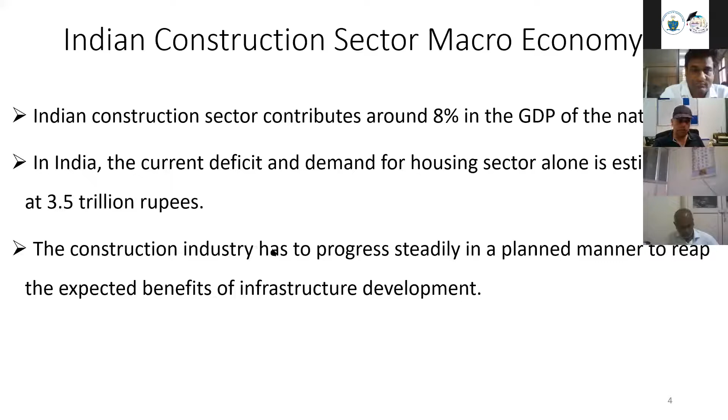Given the current scenario, it becomes more important to go for construction activities which require less time and less human intervention. We have to think out of the box, because traditional construction activities are not going to work now—there's a requirement of more manpower at the site and more human contact. We need construction where human contact is less and speed of construction is fast. This is where precast and prefab construction becomes more relevant.

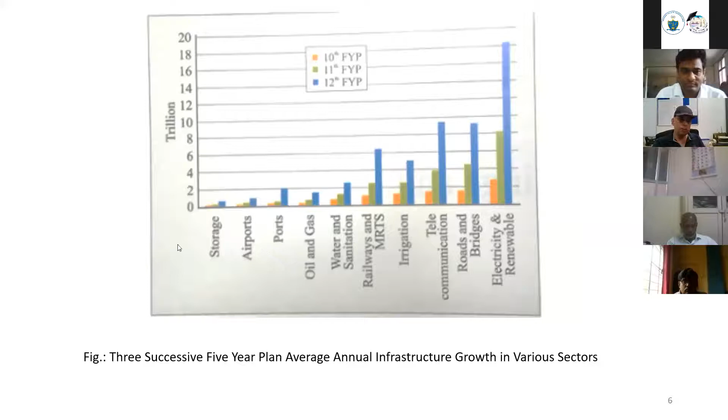In terms of growth, we can see a steady rise, but we are still far behind contemporary countries. Looking at three successive 5-year plan average annual infrastructure spending, we are lying somewhere here—railways need construction, roads and bridges need construction, electricity and renewables need construction. So construction is everywhere in the major sectors where government is spending heavily, and this is the amount being spent through contribution by various agencies.

We are, of course, very near to 2022, so the demand can be about 50 million units. And the construction of new houses is becoming complex due to high prices of land, material, and lack of initiative in new construction methods.

To overcome such challenges, many countries across the world have promoted precast construction to be applied in infrastructure practices. If you recall, when COVID started and the Wuhan episode happened, there was a lot of news about China making hospitals within a few days. That was also a sort of precast or prefab construction. Now governments across the world, including India, are struggling to make rapid constructions for hospitals.

In fact, because of that, they are taking railway wagons for housing patients. If we had rapid infrastructure and construction practices, those railway wagons might not have been required. But maybe down the line we'll also develop such techniques so we can rapidly make buildings, like China made a complete hospital building in 3 to 4 days. It's like governments are going well ahead of us.

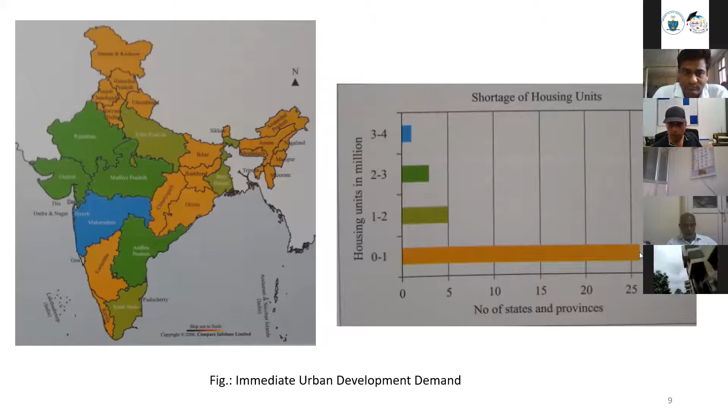Singapore's government issued guidelines for precast construction to be used in housing systems. Precast systems were popular as they were found to be superior with shorter construction time. If you see the urban development demand, the shortage of housing units is immense. This talks about 2012, but if we talk about 2022, it's almost double the demand now.

Coming down to precast and cast-in-situ concrete. How do we define precast concrete? It is a construction product produced by casting concrete in a reusable mold or form, which is then cured in a controlled environment, transported to the construction site, and lifted into place. Whereas cast-in-situ concrete is where we carry out the activities at the building site only.

The simplest example of precast concrete you can understand is paver blocks. That's also a sort of precast concrete because paver blocks are constructed at casting yards and brought from there. We cast concrete in reusable molds or paver block forms, cure them in a controlled environment at those yards, and then transport them to the construction site wherever needed. That's the simplest example, but of course a very small unit.

People nowadays talk about slabs, beams, columns, and so many things - we'll come down one by one to that. The obvious advantage of precast concrete is that we have a controlled environment with good control of mixing, curing, etc. But with cast-in-situ concrete, we might have made a very good mix design and done everything excellent, but if the person casting the concrete is not an expert, we cannot expect the same quality as precast concrete.

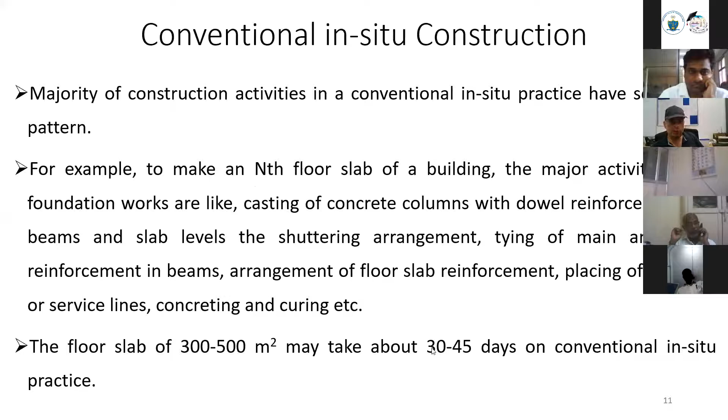Whereas if you go for precast construction, we don't need to wait, because this 30 to 45 days hardly comes down to 3 to 4 days. So if it's a 50-story building, with the conventional method it can take a huge time, maybe 3 or 4 years. And nowadays time is very important, so we cannot do it like that.

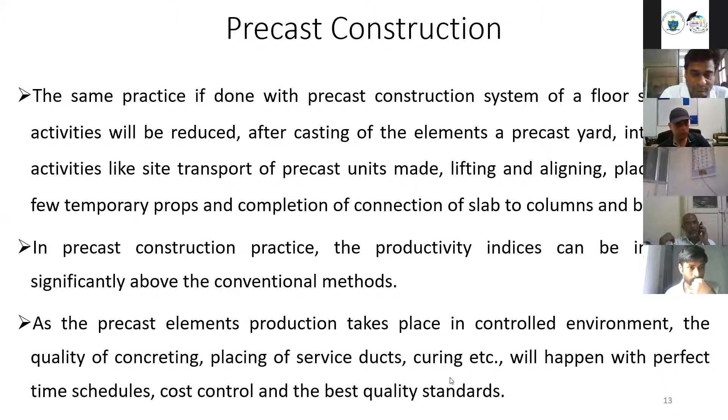And the productivity indices can also be improved significantly above the conventional method. And as the precast element production takes place in controlled environment, the quality of concreting, placing of service ducts, curing, etc. will happen with perfect time schedules, cost control, and best quality standards. So that is the advantage of precast construction.

So if we sum up the merits of precast construction, one is it's highly durable, it's fast deliverable, highly versatile. You can have any shape, any size as per your wish. It is economically affordable and it conserves materials and promotes sustainability. So overall, we can define the merits in 3 categories: quality, time, and cost. Better quality, less time, and less cost.

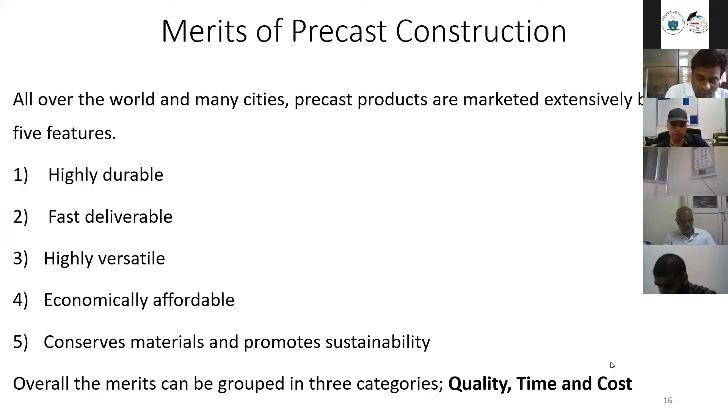Cost, of course, sometimes questions may be raised that it depends on the scale of that activity also. But at large scale activity, cost is always less. If it's a single house and the house types are different, then it might not compete in cost, but quality and time, it always will compete. For large scale construction, the cost will be less, except very small constructions or very typical types of constructions which are different. Here, the cost will be less if there's a large scale construction and the type of construction is same, all the building units are of same type.

So you can see this time, quality, cost, they are the merit factors of precast concrete technology. Quality, as I have already said, in case of ideal factory environment, all seasonal effects and difficulties are eliminated. We know that those who have been working in construction or in concrete technology, even in the lab, if we cast the concrete in summer or in winter or in rainy season, we get different strengths. So if it is difficult to even have quality control on the external environmental factors in our concrete labs, then it's very difficult to have those controls at the sites.

Okay, so that is very important. We need to understand this, that when we cannot control the same thing in our academic labs, how can we control that at the sites? So the controlled conditions of factory or casting yards make use of high strength concrete and lightweight concrete or other special concrete mixes easily advisable, they can use easily. They can have tight scheduling, work organization, and expert handling, which leads to more efficient quality management. There's more accuracy and better craft work for finished product which is easy in factory production.

You can have better type of formwork because it comes to the cost of formwork also, because if you are having a formwork for say 2-time use, or if you are having a formwork for 1,000 times use, then it depends.

The cost comes down, so they can spend on the form works also. Mechanized ways of concrete production enable concrete products like hollow core slab, rib slabs, etc. Use of color concrete, rubber, plastic fiber, and FRP liners and steel molds can bring exquisite surface finishes.

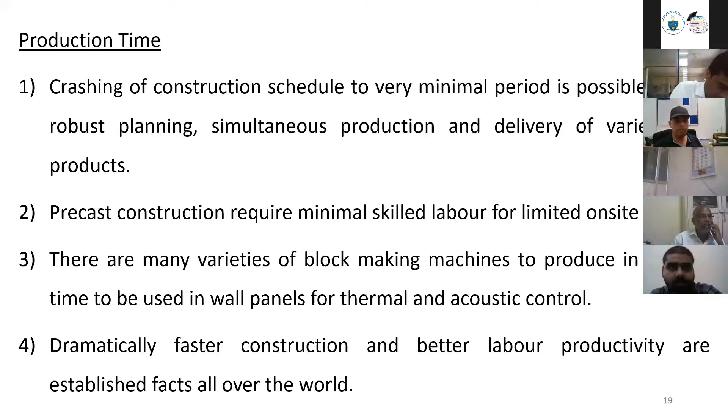If it comes down to production time, it's very obvious that production time will be less. We can crash the construction schedule to a very minimal period due to robust planning, simultaneous production, and delivery of variety of products. It requires minimal skilled labor for limited on-site works, because you need more skilled labor at the casting yard only. At on-site work, there's just jointing or connections of the precast elements. There are many varieties of block making machines to produce in short time. There's dramatically faster construction and better labor productivity, which is an established fact all over the world. That's why all over the world people are moving towards this side.

Cost and material savings can be achieved because we can have optimum use of concrete to steel, and because we'll have technical experts with us and we are using multiple times the things. So material saving will be there. Saving will be on limited use of temporary support scaffolding. Saving of construction material can be up to 30 to 50% by innovative structural forms and design of building components, which in conventional in-situ construction is not possible. The financial loss due to extended project completion can be avoided by precast construction and planning.

Now, along with precast construction, there is another term which is used: prefabrication technology. The use of precast concrete technology highly depends on the innovation of design of structural systems, concrete technology, production of prefabricates, and application of modern lifting equipments. That's very important. We'll come down to that, the lifting of these precast elements, that's very important.

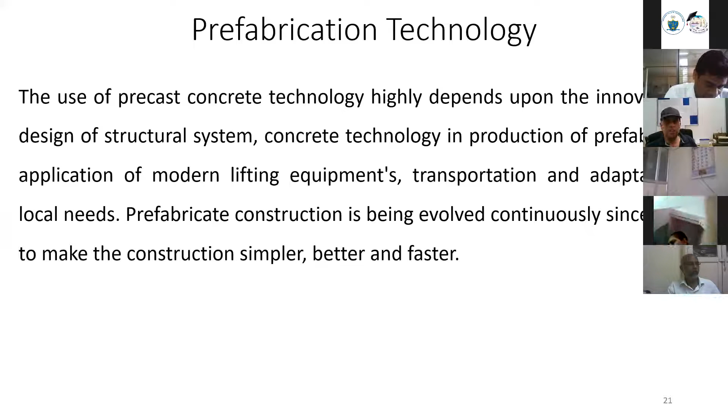You can cast wonderful precast elements, but if you don't lift them properly, the stress distributions will change, and the precast units might not be of any use, or they might even fail even before application of real load.

What we need to do in precast technologies, we need to have meticulous planning to use optimal resources and coordination with all stakeholders from the beginning of the project to completion. We need to focus on design, conceptual, innovative structural systems with more repetitive elements and optimal quantity of materials.

In fabrication, we need to achieve superior quality over conventional construction. This is very important actually, which is not there in case of conventional in-situ construction: the erection part. This is a very important aspect. If we don't handle this erection part properly, then all these three advantages will go down, they will have no use. So this part is very important. And here, of course, conventional in-situ construction has a slight advantage because erection is not needed there. So we have to be very particular.

So we need to see the system of transportation and erection of elements with high safety standards. We also need to see that the type of loads, type of moments, type of forces which are going to arise in the precast elements for which they are designed, the same type of forces should apply on these elements when they are being lifted.

Say if we are designing an element as a simply supported beam, and we are lifting it from one end only, then at that time the load is like a cantilever and there might be a failure. It can be vice versa also. So it's very important to see that the type of load or type of moments which are expected finally, the same type of moment should apply on the elements when they are being lifted. So the placement of the hooks or the type of lifting, that is very important.

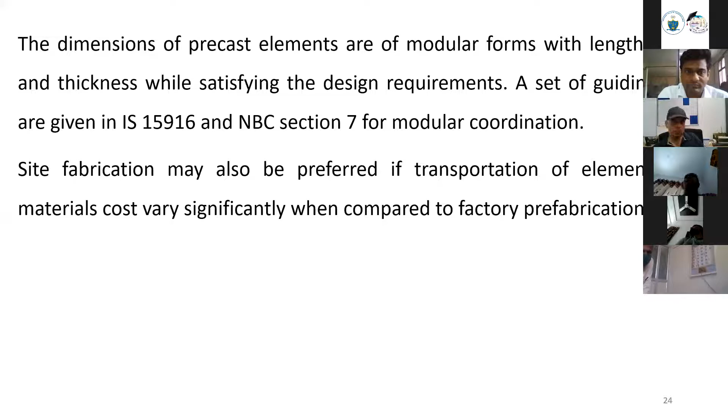Sometimes, like for foundations, we normally don't go for prefabrication or precast elements. So there are certain elements where, even after having very good precast and prefab elements, we still tend to go for cast-in-situ construction. So there is no harm. One should not always try to go for 100% precast-prefab construction or 100% cast-in-situ construction. There is no harm in going for a mix of constructions.

So here you can see precast concrete product manufacturing. Different types of precast concrete products can be manufactured at the sites. You can see slip form construction of a pre-stressed slab at the site. It's manual precast floor slab reinforcement, so the complete slab is this.

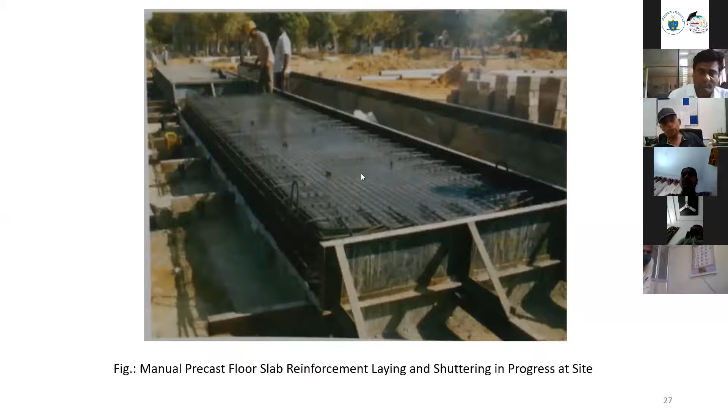Coming down to the important part, fabrication and erection. The issue in fabrication and erection is that fabrication needs to go with modular type of construction, that is important. But for erection, the issue is we need to look into the lifting part. And if we talk about fabrication, one of the important parts is curing, so we can go for steam curing, etc.

Curing can be achieved by 4 methods: conventional water ponding, water sprinklers or mist curing, immersion in tank, steam curing, and chemical spray curing.

It is very important why we are focusing more on curing, because there's a series of activities in the casting yard. If we go for fast curing, then even if instead of curing for 7 days, we go for curing of 4 days and get the same strength, those additional 3 days can be used for casting other material. So it's very important to reduce the curing period as small as possible in precast construction, because that will bring economy of scale. That's why curing is given a lot of importance in casting of precast elements.

Similarly, demolding is also related to curing. The earlier the curing is achieved, the earlier demolding can be done. So demolding is also a very skillful process. A 1-day or alternate-day cycle is to be chosen to improve production of precast elements. In flat elements and long-span beam elements, side shutters can be removed after 1 day, and bottom shutters after 3 to 5 days. So casting, demolding, and curing are all very important.

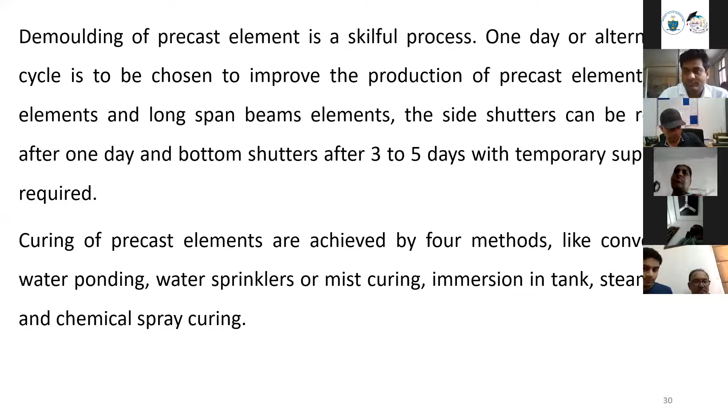We need to reduce the time as much as possible, because here it's not like in-situ construction. There's another lot which is ready to be made as precast elements. So even if we reduce the cycle by 1 or 2 hours, it leads to a large change in the economy of the casting yard or the factory.

We just go for plywood or timber mold because we don't need to use that for a large number of times. But here, because every day there's a casting, every day the mold is being used, it's very important how many useful repetitions we can have. For plywood and timber, it's minimum 25, maximum 60. Concrete mold is 70 to 100, steel 500 to 2000. So depending on the scale of the industry, the work order, and the number of elements being made, one can decide whether to go for plywood and timber mold, concrete mold, or steel mold. For bigger industries, one will always go for steel mold.

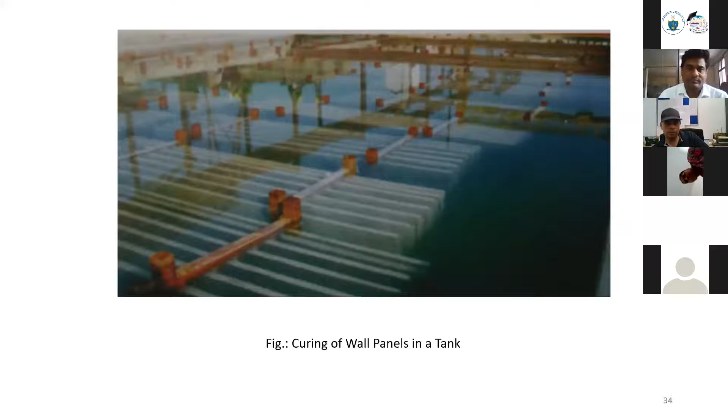This is the curing of wall panels in a tank. Here also you are seeing an innovative way - they have put them in a vertical manner so that a large number of wall panels are cured equally. Such technologies or small interventions we always need to do.

Stacking, lifting, transportation, and erection are all more or less related, and they should not cause quality issues in a prefabricated manner. Stacking should be done with adequate support so the element is stable under its self-weight. It cannot happen that we cast a simply supported beam, meant to replace a simply supported beam, and during stacking we put supports at L by 3 from each end, or sometimes towards the inner side. If supports are placed towards the inner side during stacking, due to the load of other beams above, the beam will start behaving as a continuous beam, but it was actually designed and cast as simply supported. So there might be a failure. Stacking is very important - we need to see at which place to provide support.

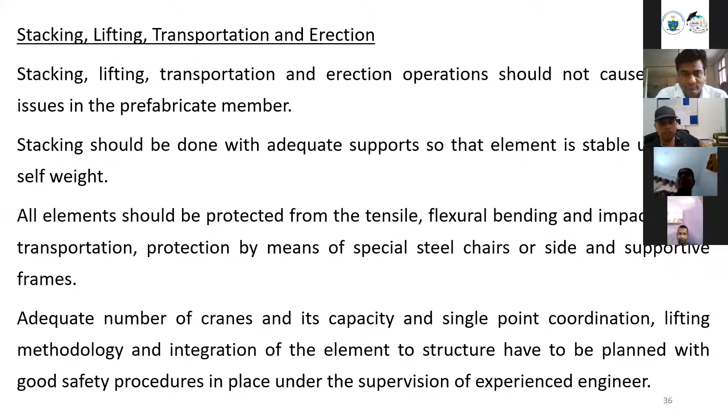When we are placing the precast element, at the time of placement it has no other support, so it is very fragile. If anything happens, the precast element will fall down. This is one of the reasons, I'm reiterating, many elements have failed when they tried to place the precast elements there. So it is very important.

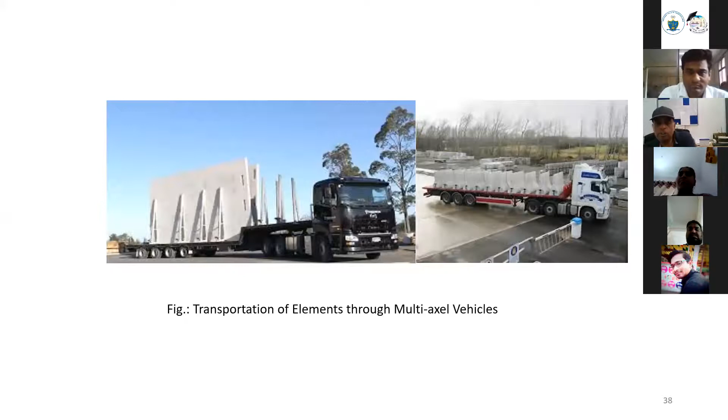Again, erection is very important. During erection, if you change the support conditions, failures may happen. So this erection part is also very important. You have to put it in a particular sequence. If it's a wall panel that is vertical, then when it is being erected, its elevation or orientation is not being changed. So that is very, very important, the erection part.

If we come down to the economics of precast construction, what is more important is the location of prefabricated construction and state taxation laws. Still, if you talk to persons dealing in prefabricated construction, many factories where bigger prefabricated elements are cast are mostly located in places like Himachal or Uttarakhand, where the tax laws are very good and appeal to them. So even if in Rajasthan or MP you are making a prefabricated building and you order prefabricated elements, mostly they are coming from as far away as Uttarakhand or Himachal.

But even then, if the scale of construction is large, it's still economical. But consider a case if the same factory is located very near to you, then it will be much, much more economical. So economy in production depends on the modes also.

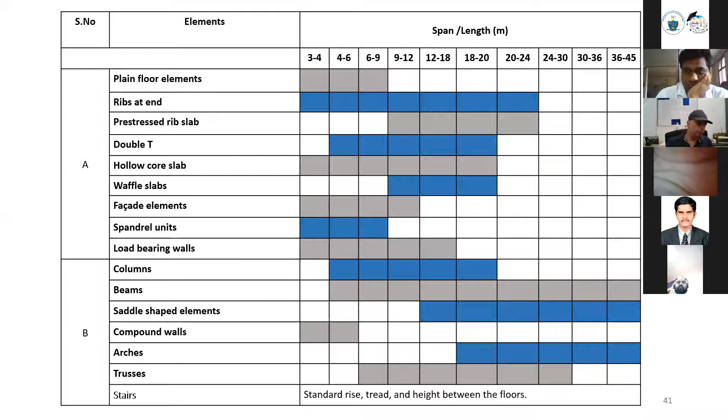Similarly, we know that arches are useful for large spans, so this precast or prefab arch construction is useful only for larger spans. So for every element you need to see this tentative guideline, whether my precast construction will be economical or not. If I am going for a pre-stressed rib slab, and it's a small rib slab, this might not be economical precast construction. But from 9 to 24 meters, the precast construction might be economical.

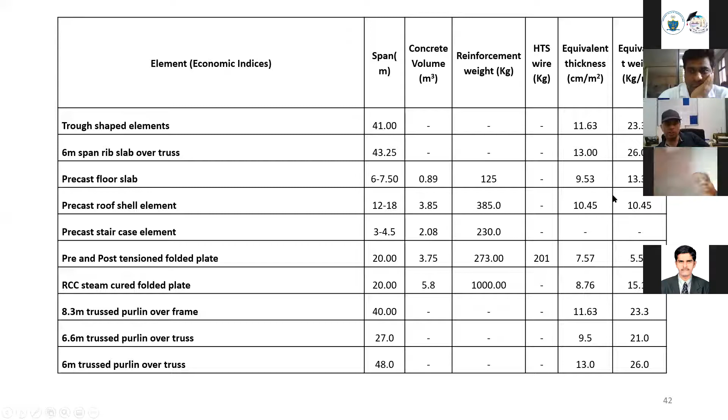This is a rough guideline to decide whether you should go for precast construction or prefabrication of elements. Some economic indices are given here, like a 6 meter span rib slab over truss, with span of 43.25 meter, equivalent thickness, and equivalent weight given in the literature. From there you can pick the cost which will come in precast and prefab construction.

Different types of prefabricated elements include columns, beams, slabs, and even staircases are available nowadays - prefabricated staircases, lift walls, lofts. So all types of elements are available.

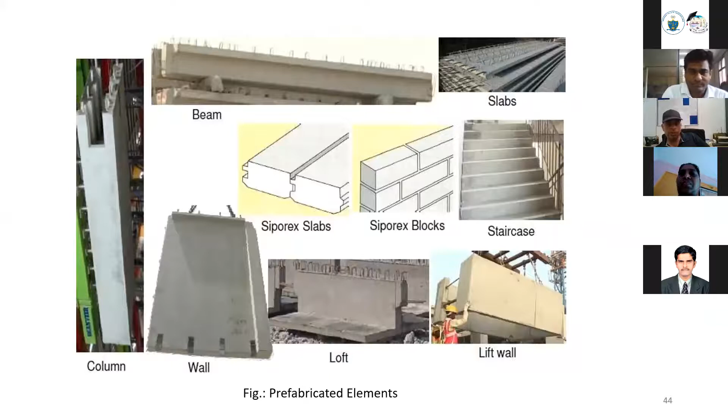Now coming down to building systems, having discussed the types of precast elements, we can define precast building systems in 3 categories: overall structural system, system for lateral load resistance, and floor and roof system.

The structural system can be a skeletal frame system, large panel system, cell system, or hollow block system. In skeletal frame system, we can have low-rise portal frames, multi-storied frames, and slab column systems with shear walls. Those we see in conventional day-to-day life are more or less skeletal frame systems, suitable for schools, industrial buildings, commercial buildings, parking structures, airport terminals, and storage facilities.

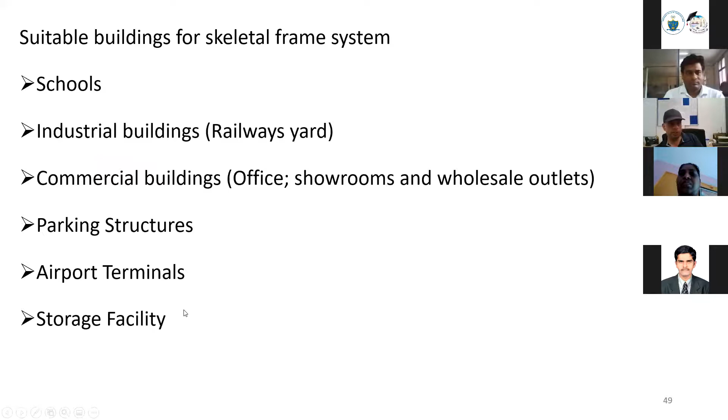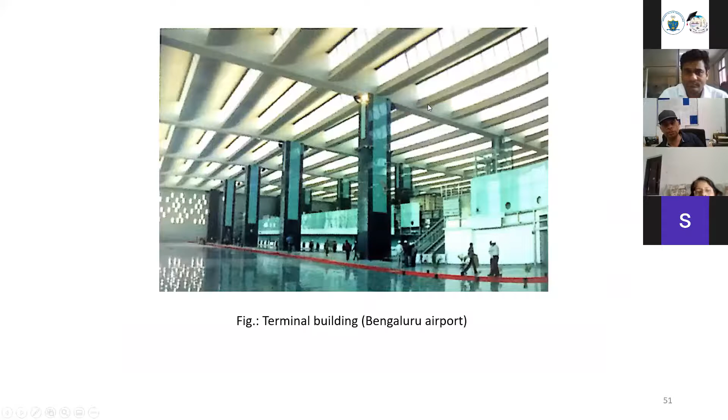This is the terminal building of Bengaluru Airport, again a precast construction. You can see the shape and size which is difficult to achieve with conventional in-situ construction. Other examples include the material storage shed in Patna and Nehru Stadium in Chennai.

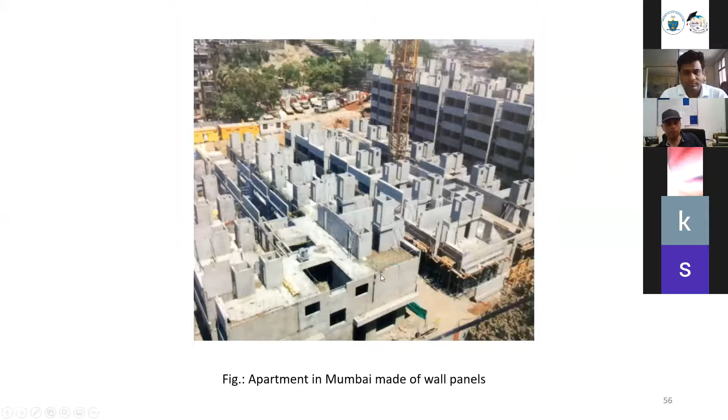Large panel systems have load bearing panels, with advantages like close partitioning or space achieved, smooth surface finish, insulated panels, and proper joints. Suitable buildings are residential buildings and miscellaneous dwellings. These apartments in Mumbai are made of wall panels - more or less a wall panel type of construction.

You can also have cell systems, where orthogonal slab and wall are cast together as an integral unit to create a box type structure. They are suitable for enclosed spaces and can be used as a subsystem within another system - suitable for dormitories, hotels, studio apartments, barracks, lift shafts, kitchens, bathrooms, and closets.

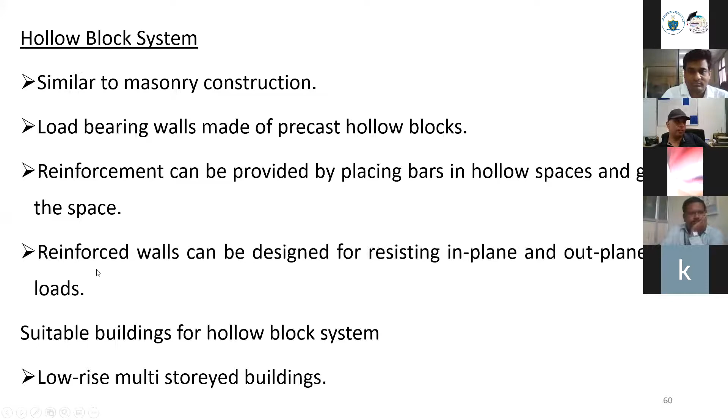Hollow block systems are also possible, though quite old. People used to have them, then shifted away, but nowadays with improved construction quality, people are again talking about hollow block systems. Two decades back there was a lot of talk about hollow block construction, but the construction cost and quality were not good, and the thickness of elements was very small, leading to a lot of failures. Now sophisticated machines are available, so people are moving to the hollow block system.

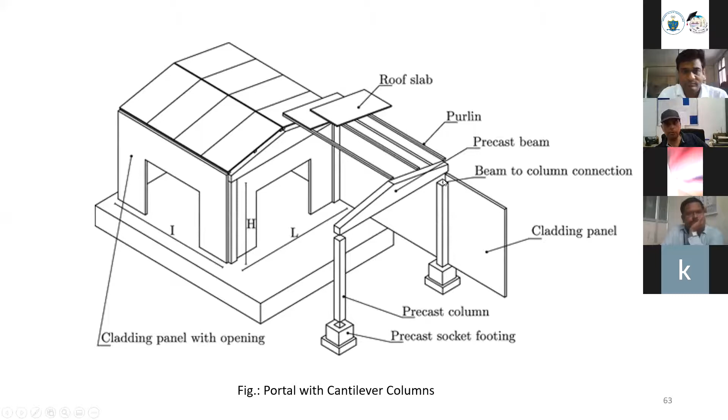You can make systems for lateral load resistance like shear walls. For low-rise portals and frames, like cantilevers fixed to foundation, you can have a cladding panel with opening, precast socket footing, a precast column, cladding panel, and beam to column connection. Different types of activities are possible.

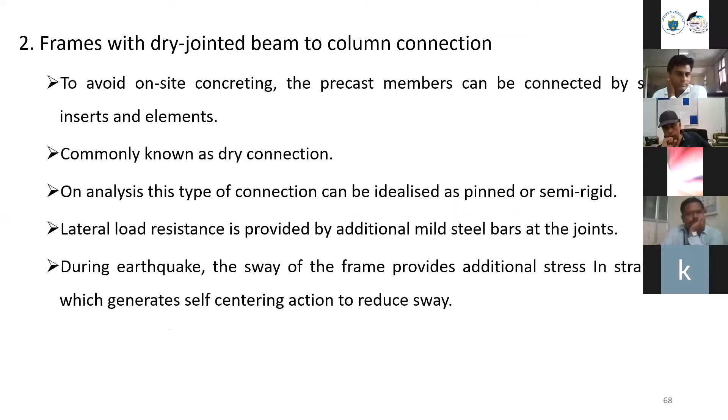You can have frames with dry jointed beam to column connection. As the name says, dry connection means you need not do any in situ construction there. You don't need to cast something there. So for that, you need to have corbels etc. So you can make your elements like this.

Similarly, you can have wall systems also. Different wall systems you can make using composite construction, this precast construction. Floor systems also, you can have different types of floor systems. You can have multiple one-way precast units.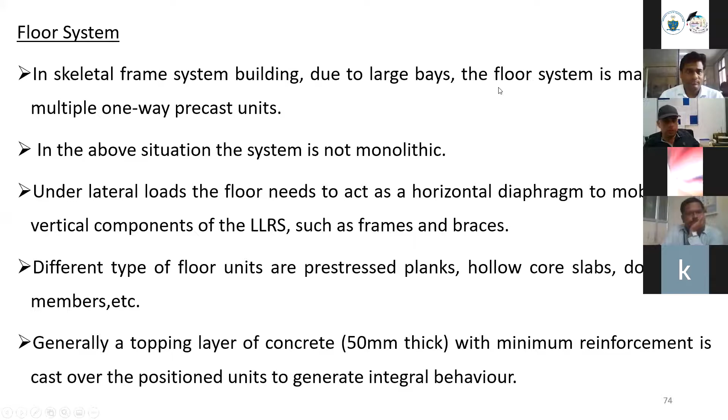What is important is when we talk about floor systems, we always know that in structural engineering, whatever we analyze, we have one very strong assumption: that the diaphragms are rigid, that is, there is no in-plane deformation in the slabs. So in the floor system, it is very important that your floor slab satisfies that requirement that the diaphragm is rigid. So one needs to understand that, and different types of interventions you can do to keep the diaphragm rigid.

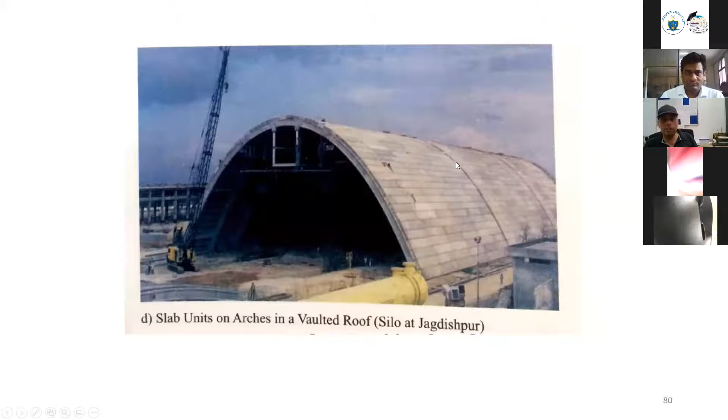Then roof systems, also different types of roof systems can be used. Here you are seeing slab units on trusses, slab units on truss purlins, slab units on trusses again. Here you can see slab units on arches in a vaulted roof, this silo. These are different types of slab units, placed on sort of arches in a vaulted roof. So you can have multiple types of construction.

Now what is important for columns is because the beams will be placed on the columns, it is very important that the beams can be placed properly on the columns with a proper connection. I think there are certain queries, and I will come to those one by one, just once this is finished. So the columns - what is most important is how we are going to place the beams on the columns.

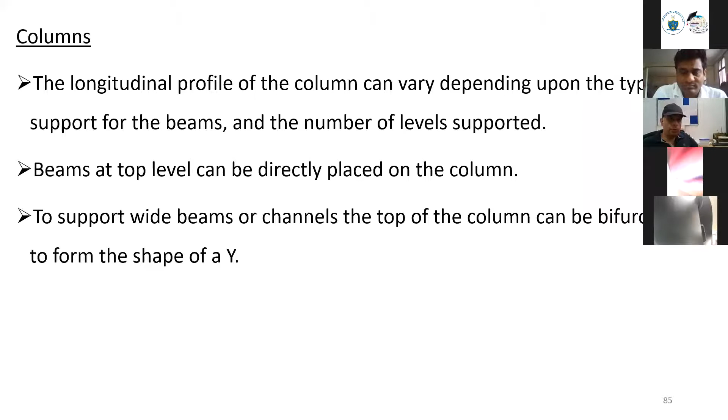The idea is you have to place the beam safely, and the way in which you are placing the beam, the analysis should reflect that. If I'm placing the beam here like this, then it's going to be like a simply supported beam, or the joints are pin joints. But if somehow I pass the beam through the column and then do some wet casting here, then I have to design it as a rigid jointed member. So that is what we need to do.

So you can see here the girders with gutters, and trough girder also you can see the Y-shaped column, this Y-shaped column.

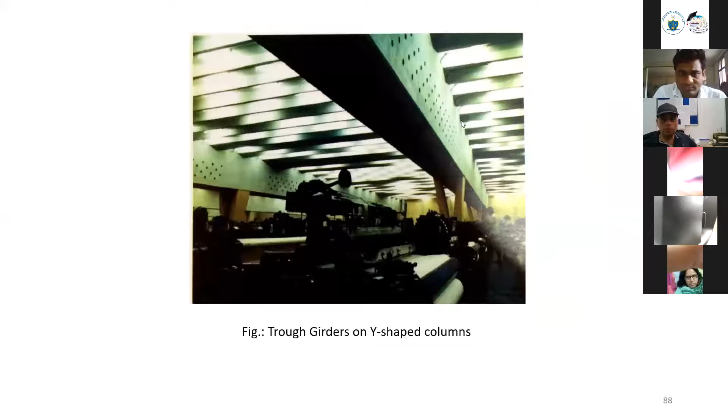So through this Y-shaped column there is a trough girder which is going on. So they have their own floor units. They can be a plank, hollow core unit, ribbed slab unit, single T and double T units, waffle slab unit, or composite slab units.

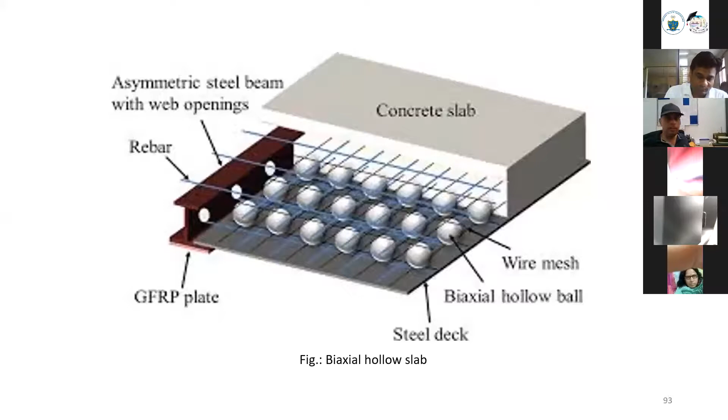So like these are hollow core slab units, and these are double T units. You can see double T action here. You can also have biaxial hollow slab - you can see there's a hollow slab with biaxial hollow balls put in to reduce the weight and to have more rigidity.

In case of roof units, similar to floor units, roof units are defined for use. You can have purlins, roof girders, trusses, arches. Even these precast concrete trusses are available in the market - you can go for arch type truss or triangular type of truss. You can get them readily from the market, from the casting yards.

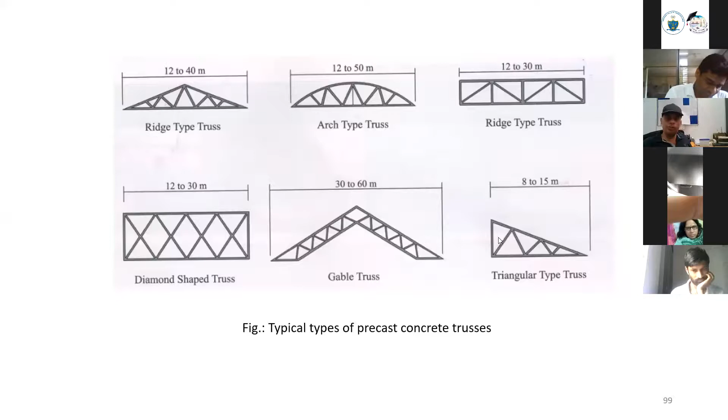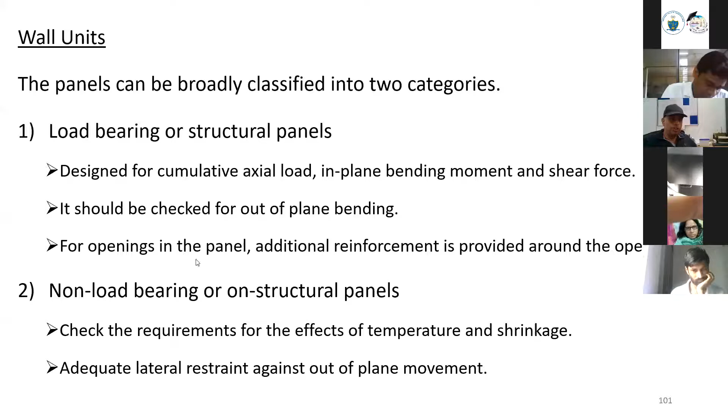Wall units can be of two types: one is load bearing or structural panel, the other is non-load bearing or non-structural panel. So these are load bearing panels which will take the loads, or we can have facade panels. In foundation units, what we need is for it to take the load of the column etc, so we can have socket units or pad and pedestal units. This is how we can have the foundation units.

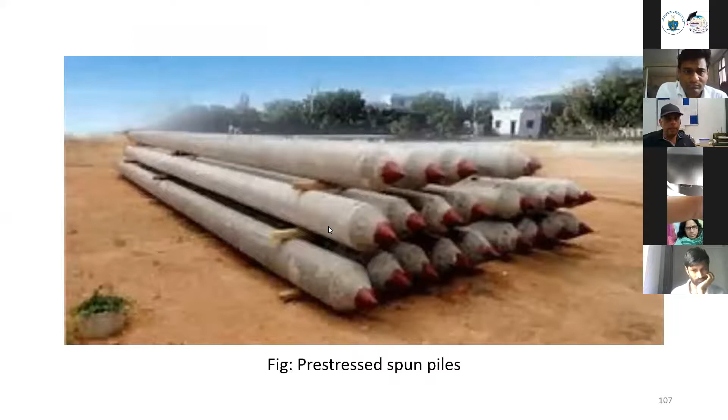We can even have pre-stressed spun piles and miscellaneous application units like stair units, balcony units, lift shaft units. This is formwork for precast staircase - you can see precast staircase here, and you can also see erection of precast staircase.

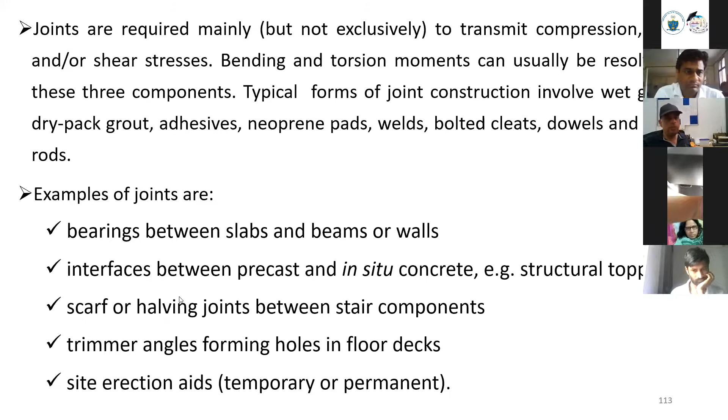What is more important in case of precast units is connection, because if you are not able to have proper connection, then your entire design can be a failure. There can be different types of connections: column or wall to foundation, column to column, beam to column, beam to beam, slab to slab, and structural steel work. We need to work on those joints.

From a resistance point of view, the building should act as one. So it's very important to have a proper connection so that the entire building becomes a single unit. It should not behave in isolation.

Thus it is clear that all aspects of component design and structural stability should be dealt with simultaneously in the designer's mind. Structural stability is the most crucial issue because it involves design of both the precast concrete component and the connection between them. So we need to work on stability and robustness. Stability means adequate resistance against side sway, while integrity and robustness mean correct joint design, attention to detail, and prevention.

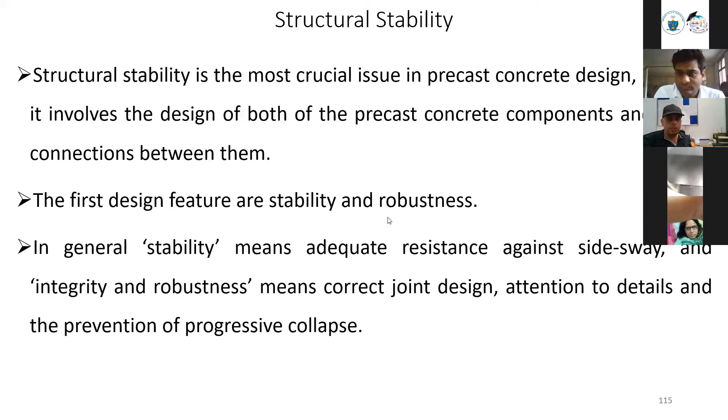So these are the keywords: stability and robustness, if you are working on precast construction. They are scrutinized by checking authorities more for structural stability, integrity, and resistance against abnormal loads than for design of individual precast components, which usually have adequate factor of safety.

It's very important to understand that just because we have precast components doesn't mean our building becomes safe. The precast components are made in the factory where there's a lot of quality control. But in the end, if they are not seen in totality within the entire building - how they're acting and the total behavior of the building - if you're not able to see that, then there might be a problem. So it's very important to see the structural stability, integrity, etc.

The problem is to ensure adequate ultimate strength and stiffness, but more importantly to ensure that the failure mode is ductile. We know that from an earthquake resistance point of view, the failure always has to be ductile. So we need to design the joints such that the failure is ductile, and a large factor of safety is less relevant to overall performance criteria.

You can have wonderful precast elements with a factor of safety of 5 or 10, but in the end, when they are put in the building and not put in properly, that factor of safety doesn't carry any meaning. Finally, it is the factor of safety of the entire building that matters. So it's very important how you place them and how you connect them together.

What are the challenges in precast construction? The execution of a prefabricated building is a complex task with a specific time schedule and competent technical skill. Production technology and erection of components are inseparable activities, so you have to work in harmony and synchronization at the site as well as off site. There's a combined and simultaneous involvement of architects, designers, mold specialists, foremen, contractors, and planning personnel, so a lot of involvement of many experts, which requires proper coordination.

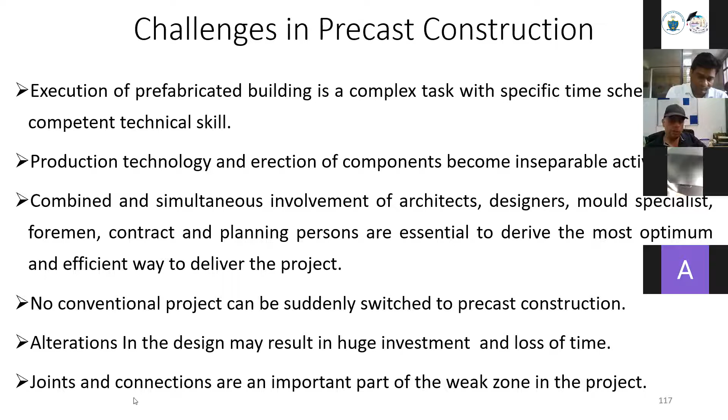So it is very important. If you miss out on one joint, then your entire project may fail. Your individual elements might be extremely good with a very good factor of safety, but in the end, the joints and connections should be done in such a manner that you get a good building. And these structures are more sensitive to dynamic loads, hence the safety of the building needs to be checked adequately.

Why dynamic load? Because in dynamic load there's movement of the building and there's stress or failure. The zones of failure are the joints, and joints are the weakest part in precast construction. That's why they are sensitive to dynamic load. Then there is a high initial cost of factories, transportation, logistics, and lack of skilled labor, which are other causes of a slower growth rate in India. Also, no robust analytical tools are available for precast and prefabricated buildings as of now.

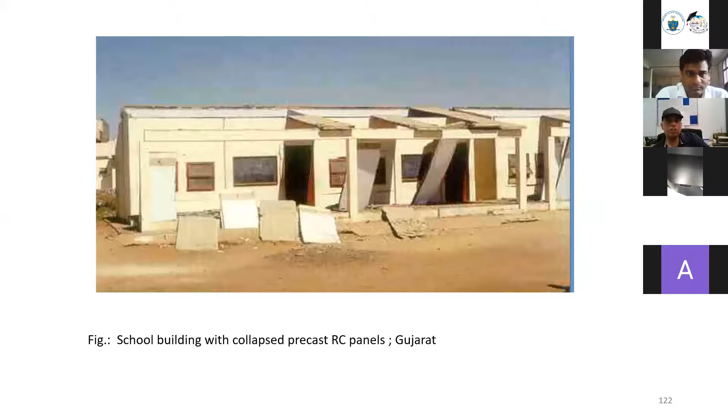A few cases you can see: precast housing in Jamshedpur, hybrid construction, tunnel form on 3 sides, this is a view of the fascia wall. You can see here a precast building with precast footing, columns, wall panels, roof, and step units. And here, because the joints were not proper, this school building shows collapsed precast RC panels. You can see there is no crack, no failure in the panels even after falling down. That means individual panels or elements are very good, but in totality they could not deliver the results expected.

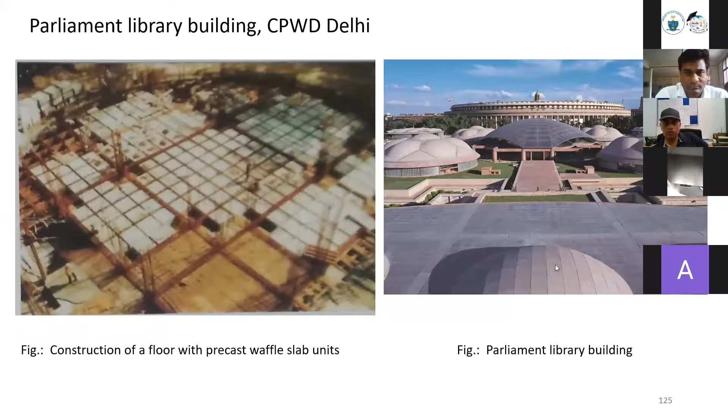Then this Ocean Engineering Center, IIT Madras, here you can see a precast roofing system with V-shaped folded plates. And here is the Q complex at Tirumala, again a precast construction. The Parliament Library building also is a precast construction, you can see these elements are precast elements which have been placed later on. This is the L&T building, again a lot of use of precast elements, a 4-story plus stilt plus ground structure supported on columns. And this is Cyber Towers, Hyderabad, where 40 mm thick precast waffle slabs have been used.

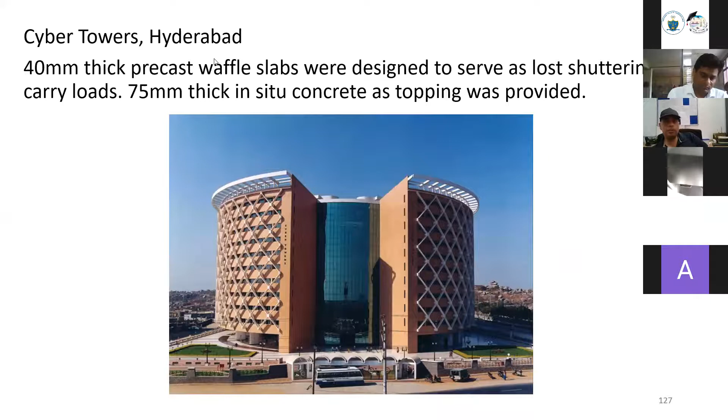And the Passenger Terminal building, Bangalore, again here we are seeing precast construction by L&T. So different types of buildings are there in India where people have successfully used this.

Okay, so now I'll deal with a specific type of construction: steel concrete composite construction, a specific type of precast, or you can say prefab construction. Here, mostly we have the girders of steel and other beams or slabs of concrete. It can be vice versa also, but most common is steel girders and concrete slab.

The advantage is speed of construction, because the steel girders don't require any casting or operations at the site. There's flexibility and adaptability with the steel sections. We can go for larger spans. There's service integration. Quality is better because steel always has better quality control. Safer construction - we don't need to do many things at the site. There are environmental benefits - we need not fine aggregate and coarse aggregate, need not excavate them. There's a higher degree of prefabrication because most of the parts or elements are taken away from the factories.

Public damage due to loss in time, route diversions etc. is minimized. You might have seen many times nowadays when bridges cross running roads, they hardly stop the traffic for only 1 or 2 days because they're putting these steel girders as bridge girders instead of conventional in-situ construction. So even in small towns, you will see they don't disturb the traffic on running roads while doing the construction, because of use of this type of construction.

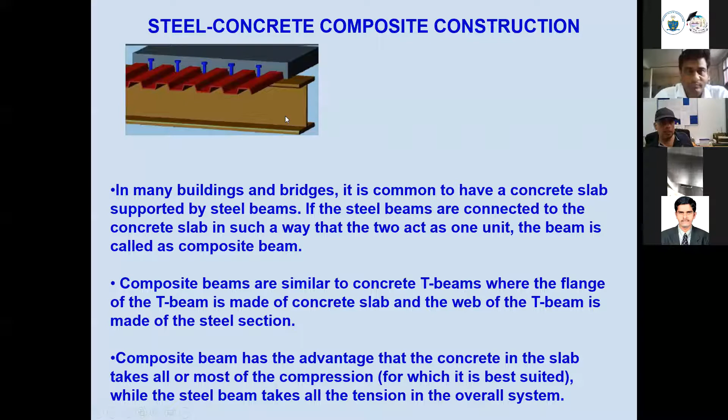This is a conventional steel concrete composite construction where you have a steel girder, profiled slab, and steel shear studs. These shear studs connect the steel girders to concrete slabs. So you can see here steel girders, shear connectors, welded wire fabric, and a bit of concrete cast here. Of course, nowadays people have precast concrete slab also, so there's a complete prefabricated construction also. We'll come down to that.

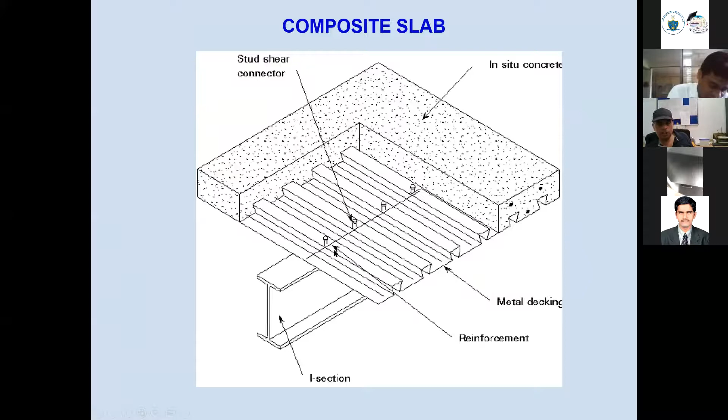So advantages we have already discussed, and now disadvantages. One of the disadvantages is shear connection installation, because you need dedicated and skilled manpower to install these shear studs, as they are the source of stress concentration. There is a lot of stress here, so you cannot go with conventional steel connection material. They are high strength steel connectors and they need a separate, dedicated type of welding - conventional welding does not work on these studs.

So this is how a composite metal decking looks like. You will see here there are deformed ribs, and the deformations on the ribs allow for a stronger bond between the concrete and the decking. So there might be deformations and there might not be deformations - it doesn't matter, but yes, of course, if the deformations are there, the bond is going to be better.

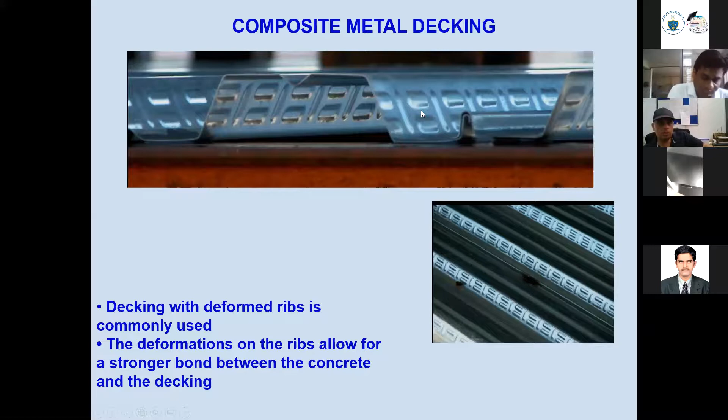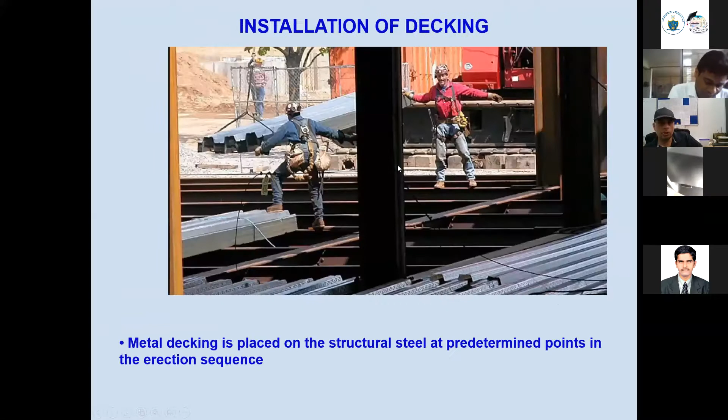Without the deck, it looks like this. You can see very closely spaced shear studs. Here there's a lot of load expected, so that's why. Otherwise, normally shear studs are placed at a certain distance apart.

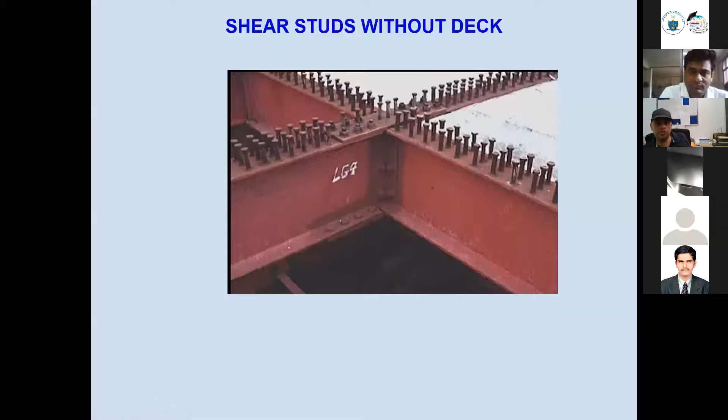Placement of concrete: there's an art to the placement of concrete. Because if you put the concrete initially on one side only, there will be deflection on that part, and that may change the behavior of the system. So you have to be very cautious, and accordingly place the concrete so that there's no permanent deformation in the sheet.

Once the concrete is cast and hardens, the strength will be more because it becomes a composite section. But before that, it's not a composite section — the total load is being taken by the steel girder and profiled sheet only. So you have to design for that case, when there's only the steel girder and profiled sheet carrying the load, and also design for the case when the steel girder, profiled sheet and concrete slab all work together as a composite construction.

That composite case will of course have less deflection, but sometimes more deflection can occur even before that, when the element is not yet composite — there's only the steel girder and profiled sheet without the help of the concrete slab, but already carrying the load of the concrete slab — and permanent deformations might occur. Those permanent deformations we have to handle and avoid.

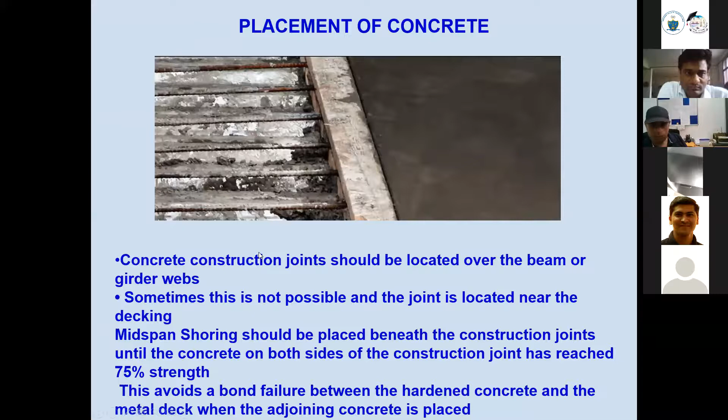The concrete construction joint should be located over the beams or girder webs, and this is how we need to check. For quality control, we can weld two sample studs sometimes and perform bending tests, etc. There are different series of tests given in Indian standard codes also, like push-out tests, etc. So before going for these shear connectors, we need to do a lot of testing.

Once we are sure about their quality, only then should we move forward. Otherwise, if the connection is not proper, it will not be a composite construction — it will just be like a concrete slab placed over a steel beam without any composite action. So it's very important: the better and well-placed the shear connectors are, the more composite action there will be.

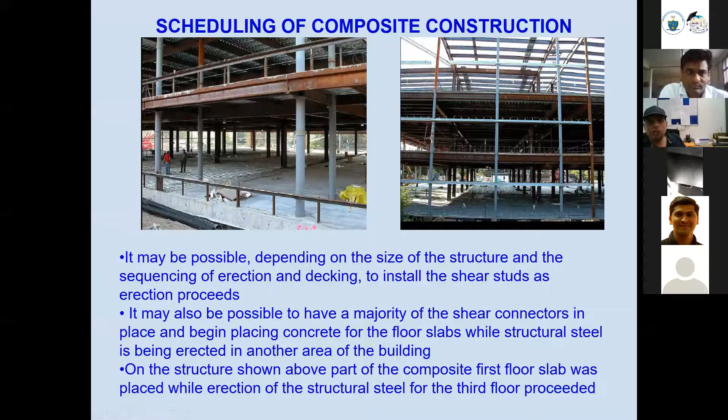Scheduling of composite construction is also very important. The advantage of composite construction is that, as you can see here, work can go on simultaneously at 3 to 4 floors, which is not possible in conventional in-situ construction. So this scheduling can always be done for faster construction.

Cambering can be done in steel girders, but it has to be very cautious and judiciously used, because like in pre-stressing, it's very important to handle it properly since it can go the other way around. If the proper load doesn't come, there will be no advantage. So what is the final load and final deflection we expect? Everything needs to be calibrated and handled very properly.

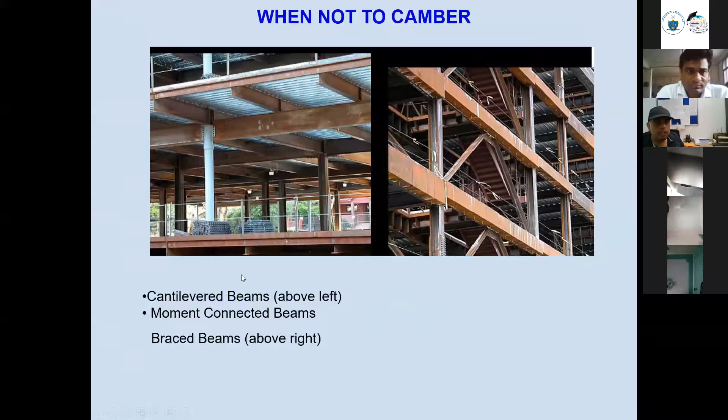This is how cambering is done, and it's also done by heating. There are certain disadvantages like complexity in detailing and fabrication. There are cases when we should not camber, such as cantilevered beams, moment connected beams, and braced beams.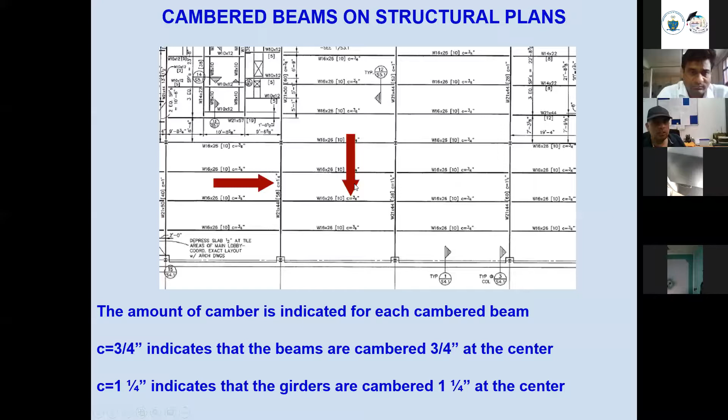For quality control in cambering, there's an American Institute of Steel Construction code that we have to follow. We also have to check the cost of cambering. The final advantage is similar to pre-stressing - we cannot pre-stress every concrete beam of 3 meters or 5 meters, so there's a cutoff point for costing. Similarly here, there's a cutoff point for the costing.

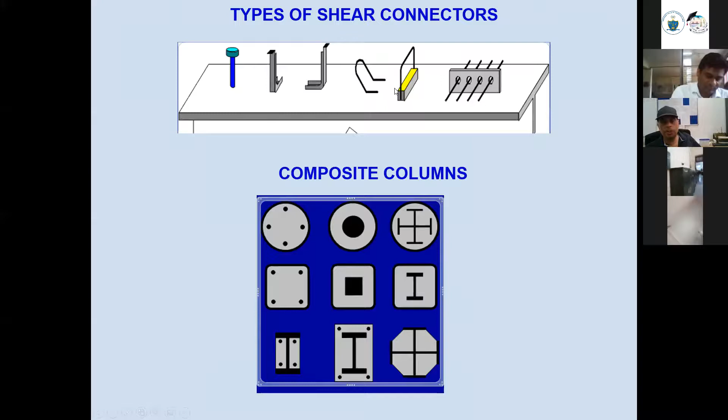The other type of construction, which is more towards prefabricated construction, involves the steel girder along with a precast slab, so now it's much better since there's no in-situ construction. Nowadays people are going with composite beams with prefabricated concrete slabs, hollow core slabs, and different types of shear connectors, like shear studs. The idea is just to have a connection between steel and concrete, so you can have different types of shear connectors and different types of composite columns.

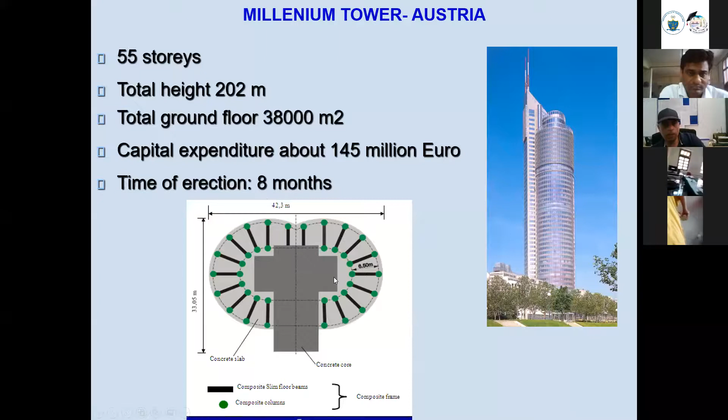An example of composite construction is the Millennium Tower in Austria, a 55-story building with total height of 202 meters. This huge building was constructed in only 8 months, which otherwise is not possible with conventional construction. This was because of the composite construction. These are composite slim floor beams, composite columns, forming a composite frame - here's its plan. Total erection time was 8 months with maximum speed of 2 to 2.5 stories per week, which is not possible with conventional construction.

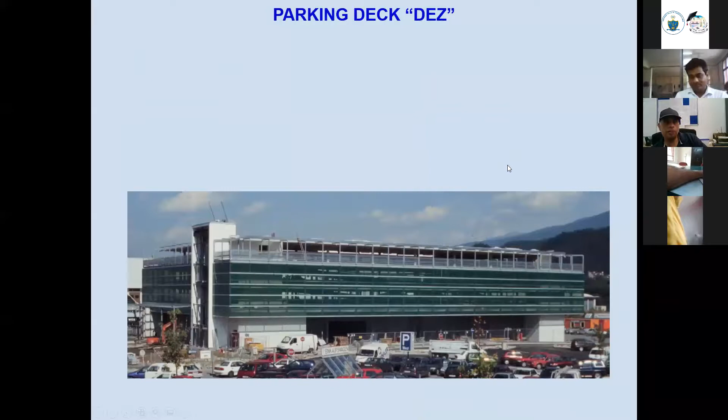Similarly, Citibank in Duisburg was a 15-story building with total height of 72 meters, also more or less composite construction, with a parking deck of 4 stories. This was complete composite construction - they erected composite columns over even 2 stories. In conventional in-situ construction, we know even 4 to 5 feet maximum can be cast for a concrete column in a day, but here a 2-story column was put straight away, not just single story. You can see multiple work happening simultaneously at different floor levels. This is what you can achieve with composite construction.

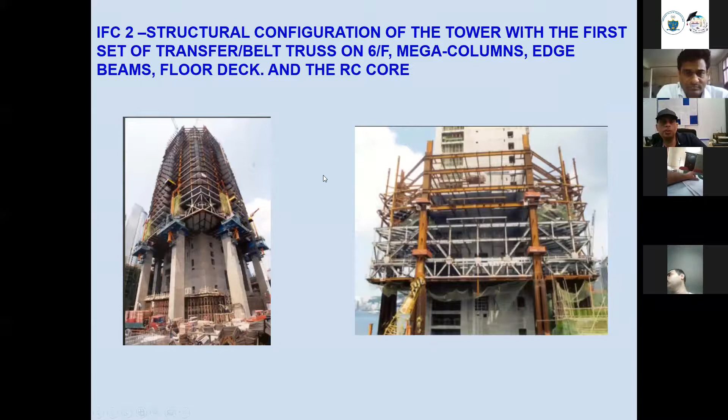These types of buildings are not possible with conventional construction. You can see this is the RC core, and this is the connection from the RC core. There are steel girders going out, and these steel girders are connected to the outer part. So this is how you connect.

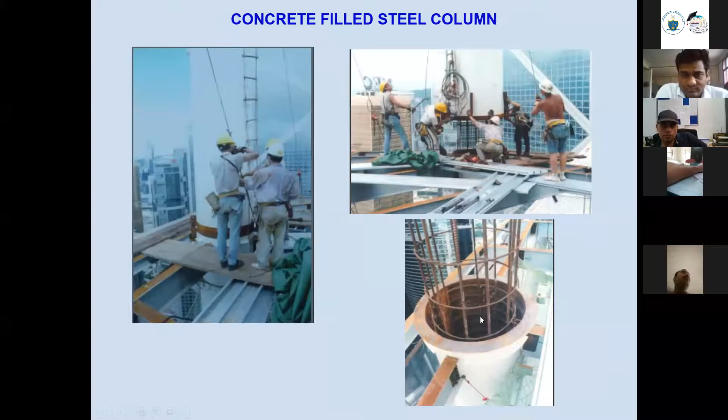You can also have a concrete filled steel column, another type of composite construction. This is a steel column which is being filled with concrete. You can have a square sectioned column also, where we infill the concrete through this. So it can work both ways around - various forms of composite columns.

Here you can see a lot of these extensions - these are actually the shear studs. So you can have different types of composite columns. Steel girders are there inside, then reinforcement is placed here, formwork is placed here, and these steel columns will be enclosed in concrete, whereas here concrete is inside the steel girder. So it works both ways around.

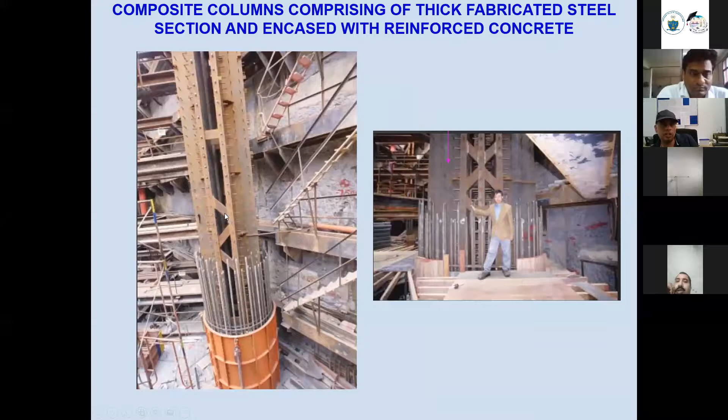So you can see here the composite columns with the studs, comprising a thick fabricated steel section encased with reinforced concrete. So it's both ways - we have seen both figures.

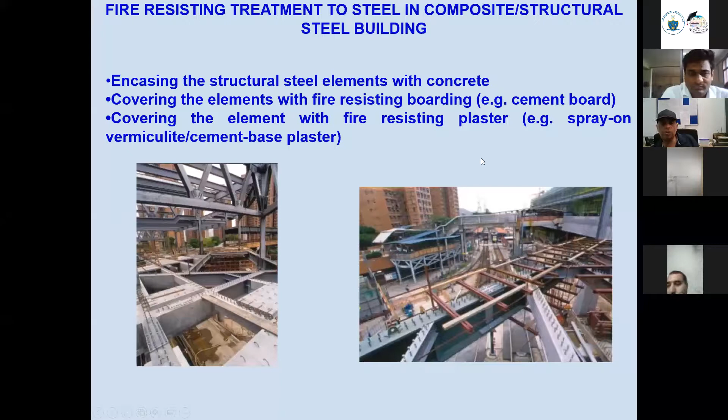One of the disadvantages why people don't go for steel construction is normally the fire resistance, because the fire resistance of steel construction is very small. So nowadays what people do is encase the structural steel element with concrete. You can cover the elements with fire resistant boarding, or cover them with fire resistant plaster. So that disadvantage also nowadays, more or less, people have come up with a solution for.

So you can see different types of these composite columns here. Typically if you see it from a structural point of view as an engineer, this is how it looks like: steel beam, struts, etc.

Sometimes damage occurs in the existing concrete slab of a composite beam, due to higher tensile stresses caused by aggressive environment or excessive loading. So what you can do is strengthen the slabs also. You simply replace the old slab with a new precast slab, and you can use stud connectors or adhesive also. These will give you continuous connection, less stress concentration, no corrosion of connectors. You can control the time dependent effects, and less time will be required.

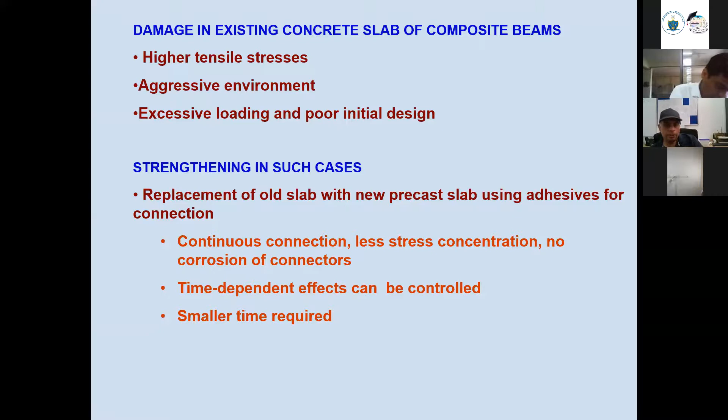So this is how it looks: normally the pockets are filled with connectors, we put the precast slab like this, then fill them with grout. What happens then is cracks appear. So to avoid these cracks, we can even connect the concrete slab with the steel girder by use of an adhesive layer also.

One interesting study we carried out found that what's important is when attaching the precast slab to the steel girder: if you put the precast slab in a casting yard for a longer time before attaching the steel girder, it will have lesser time dependent deformations. The reason is simple - there is a lot of creep and shrinkage which takes place in concrete over time. If the concrete is placed freely and allowed to creep and shrink freely, it will not have any stresses or deformations.

But once it is connected to the steel girder and you start putting forces on the concrete - if you connect it with the steel girder at an early age, and then creep and shrinkage take place in these composite girders - then there will be a lot of deformation in the entire beam.

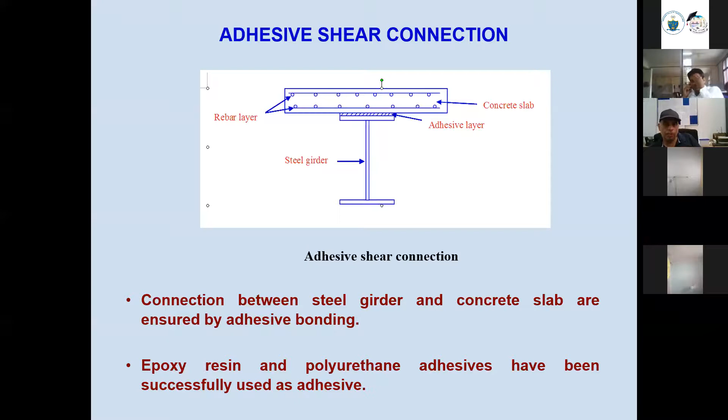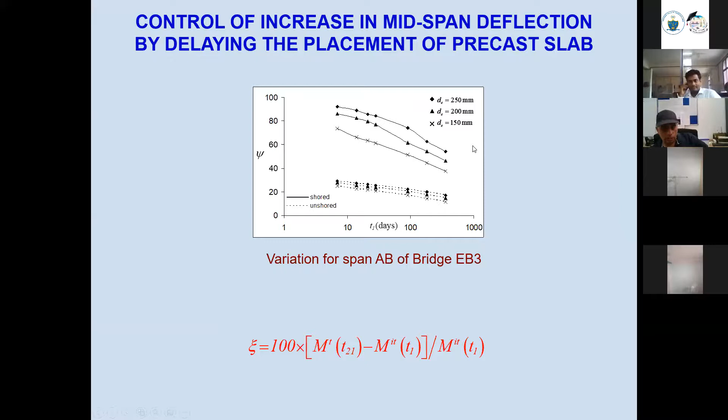It is more or less like when we are using wood in our houses for construction or wooden doors, etc. We allow the wood to season so that seasonal variations are not there in the wood. Same is with precast slab. If you put the precast slab in the casting yard for a long time, the creep, shrinkage, and time-dependent effects will take care themselves in the casting yard, and later on they will not cause time-dependent deformations.

So we need to work into that. We need to work into that.

And what is the future in composite construction is we can work on high strength weldable steels, high strength concrete, rolled plates of variable thickness. We can work on control of concrete slab cracking, external pre-stressing, better launching techniques. We can work on conceptual structural design like double composite action through upper and lower slabs, corrugated steel webs, precast concrete slabs. We can work on new types of shear connectors like adhesive shear connection, and external longitudinal pre-stressing. So these are some of the areas in which we can work in India on composite construction.

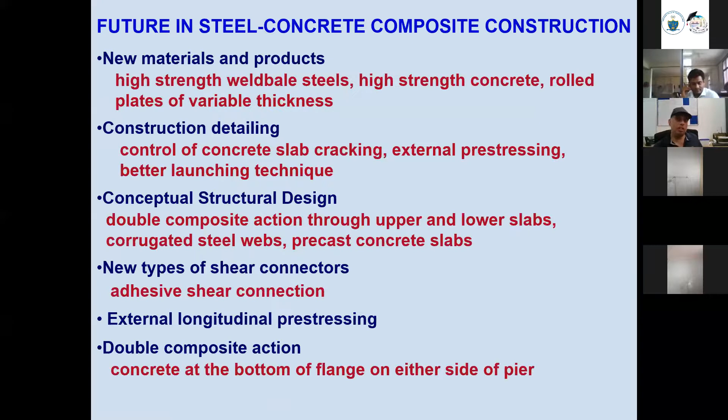Yes, now any questions? I hope I was able to clear things. Am I audible, sir?

Yes, there is one question from participant Zair Ahmad. Just a minute. The question is, they want to know in case of structural health monitoring, which are the experimental tests to be carried out in the pre-stressed concrete bridge, oblique structures.

So that is not related to this - you are talking about structural health monitoring. Okay sir, no, I can answer that, but I think it's not related to this. So the question is about structural health monitoring. But can you repeat the question? What to know in case of structural health monitoring, which are the experimental tests to be carried out in the pre-stressed concrete bridge, oblique structures?

No, it actually depends. Structural health monitoring is a very big area in itself. But more or less, as a structural engineer, we are always interested in at least deflection and cracks. So if you ask me, the number one parameter is deflection at multiple locations. Number two parameter is cracks at different locations. And then there are multiple other aspects which can be captured. Yes, okay sir, any other?

So there are certain queries written here, I can go, I think. Meenakshi has written: for in-situ construction, 28 days required to gain full strength - what about precast construction during earthquake, precast construction performance? So this was a question raised by, I think, Meenakshi. And I think I have answered this in the composite construction slides.